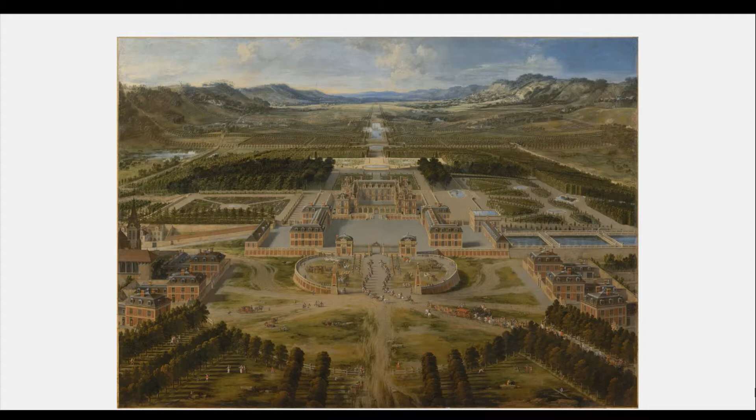The origins of the landscape ideas that underpin the urban planning of Paris are made clear by Le Nôtre's planning of Versailles, the gardens stretching to a kind of infinity, a horizon lowered so there isn't a sense of reality disturbing that infinity.

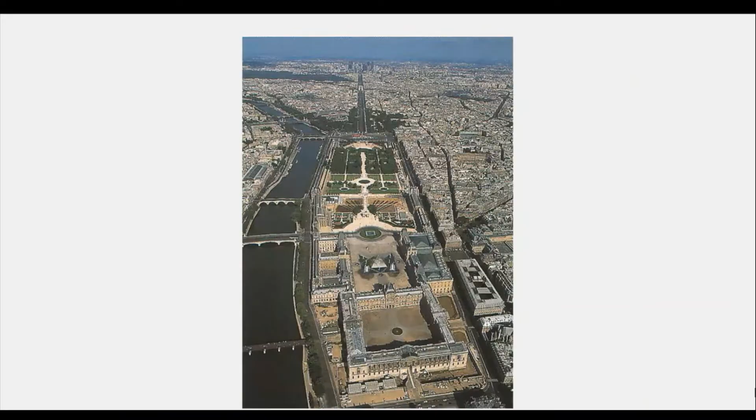And it's something that finds direct echoes clearly in La Défense, the axiality that is set up in the same way, through the grand vista and the alley of buildings around that axis.

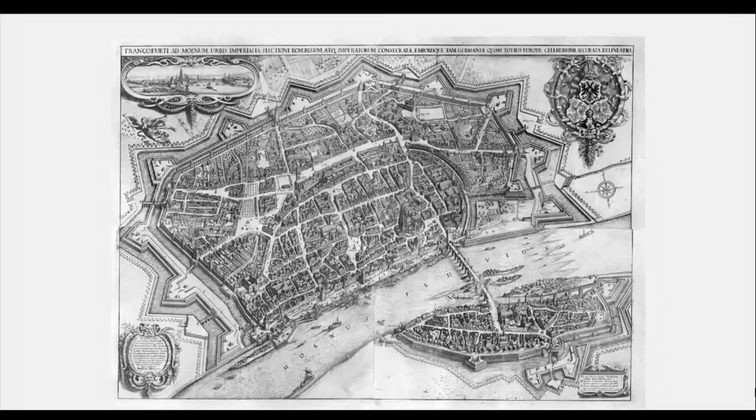That's very different from the case of Frankfurt, where the historic city was bound by defensive walls and bastions, for good historic reason, but it's then developed into an expansion that has a series of alleys of large avenues that pass beyond the defenses, which are now mainly gardens.

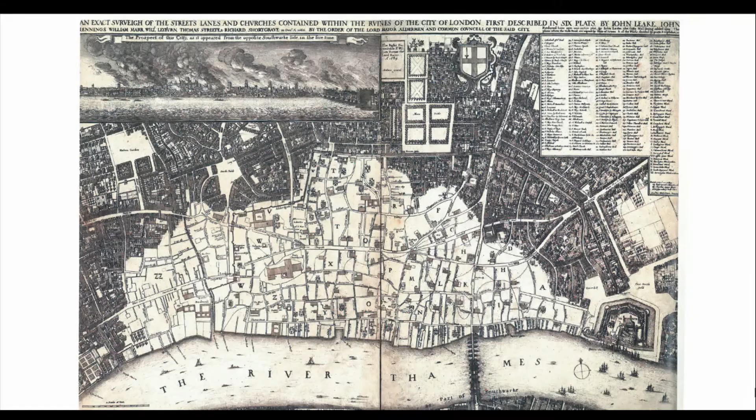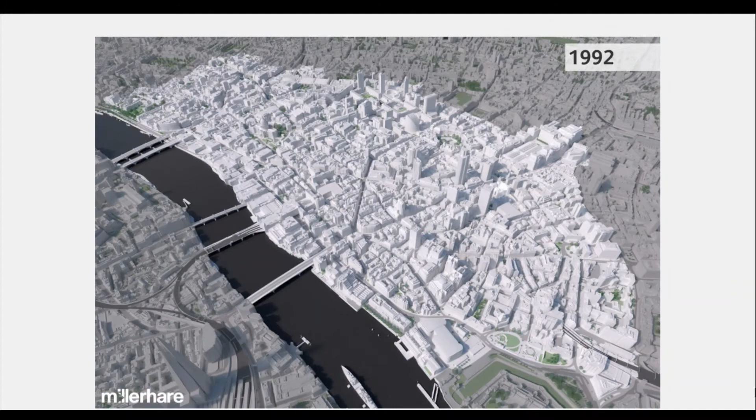Running back 30 years, we have a disposition of tall buildings treated very carefully as eye catchers on the horizon, which then develops into the more familiar sense of a cluster of taller buildings to the east of St. Paul's, very carefully created to work around those views.

And it forms a topography of high ground, peaks, lower hills. The idea being one that's derived in a way from the English picturesque tradition.

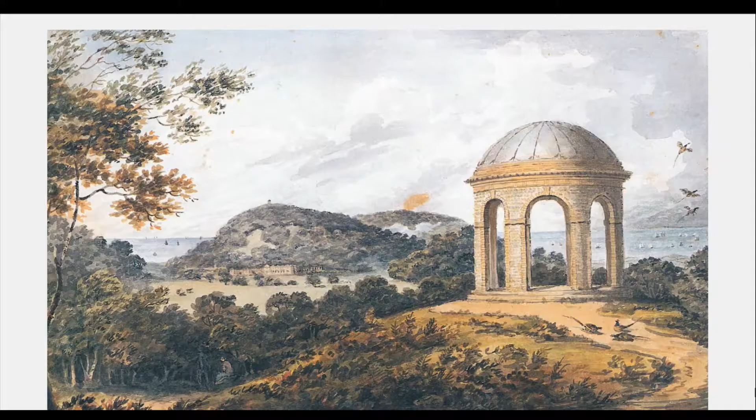This is illustrated here in one of Humphrey Repton's Red Books of 1812, a sort of before and after of a landscape tradition that sets up those vistas in an entirely different way to the axiality of the French model.

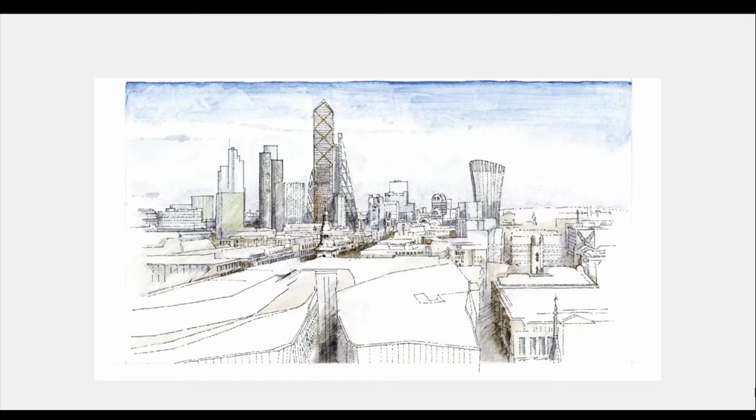And when one now finds oneself designing in the context of the Eastern Cluster, these are sketches from the competition for the Tower of One Undershaft, thinking about how it, finding itself at the epicenter as a peak, the peak, becomes a very important part of that topography.

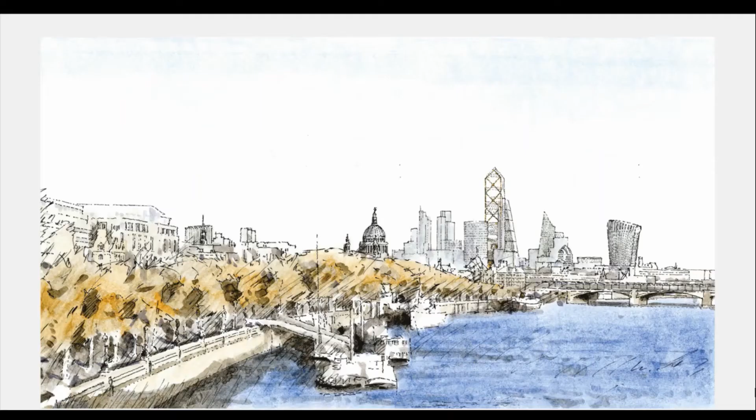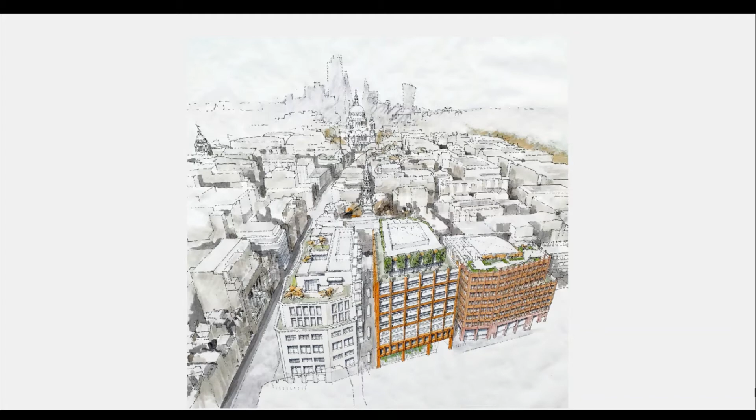Clearly seen from the river as part of a landscape beyond St. Paul's. And indeed, when understood, for instance, on the processional way, you can see how the valley described by the Leadenhall building and the Scalpel emerges to allow the dome and the lantern to remain intact against the horizon from particular views.

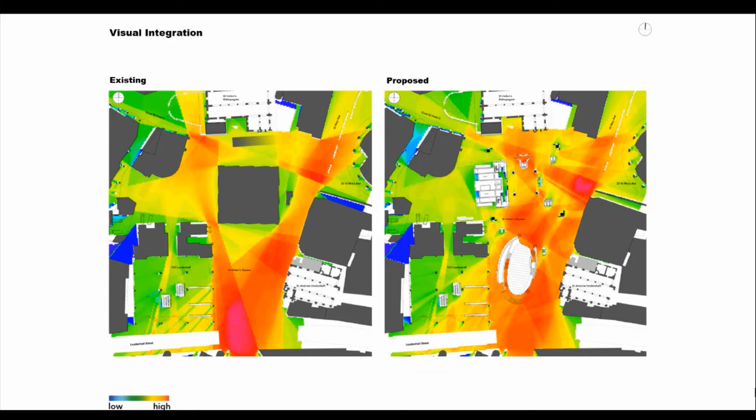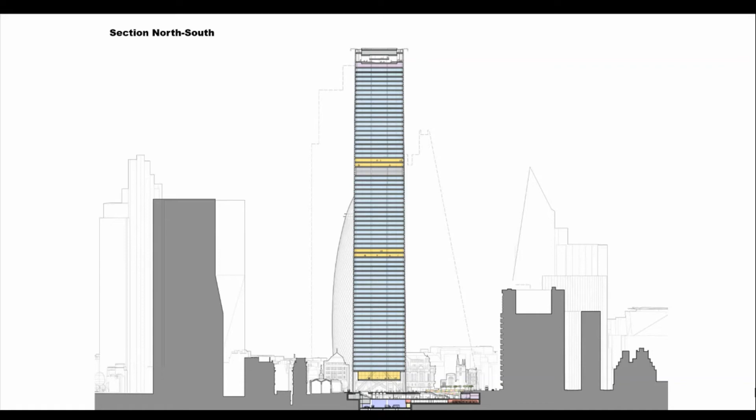This creates a sense of connectivity, of visual integration, as space syntax term it. In section, the idea is shown with lobbies lifted above the horizon of the ground, which exposes at the same height the walls of the medieval buildings, and develops a way of moving downwards to a territory at a lower court level.

So this is the ground, opening up a north-south axis of 100 meters more. It's very important to be able to set the expansion and activation of that at the lower level.

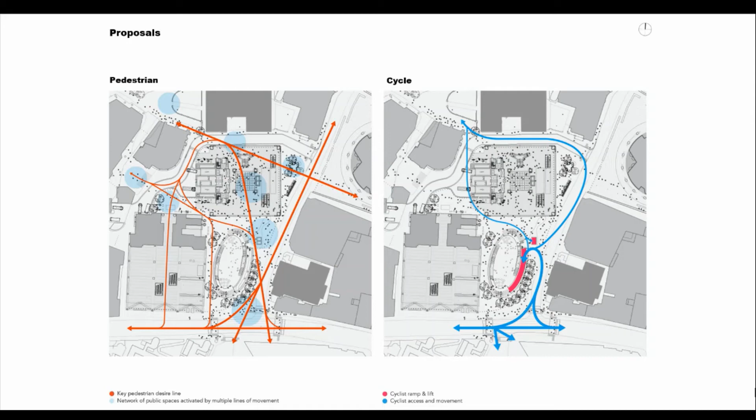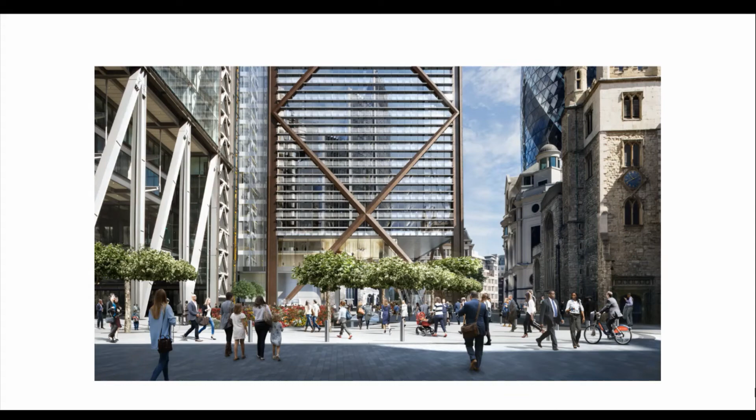At ground, the result is a huge increase in porosity and permeability for the pedestrian, and access for cyclists into an undercroft below the court at the lower level. So this is ground, and that extensive vista that is opened up.

This is the lower court area, which is an open area that works very well with wind mitigation, and has around it the retail and restaurants.

Importantly, with the green, there's an entrance with the veils of security that gives direct access to the green lifts, the firefighting lifts, which actually take you to the very top of the building, which we'll come to.

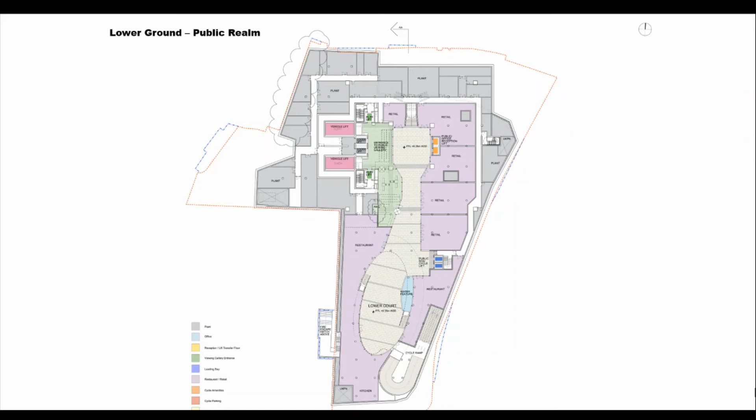The lower court is a place of conviviality, of meeting, and has, very importantly, below it an extensive area for bike storage, 1,700 places, and all the changing facilities, and to the upper side of the image, the servicing of the tower contained in a double basement.

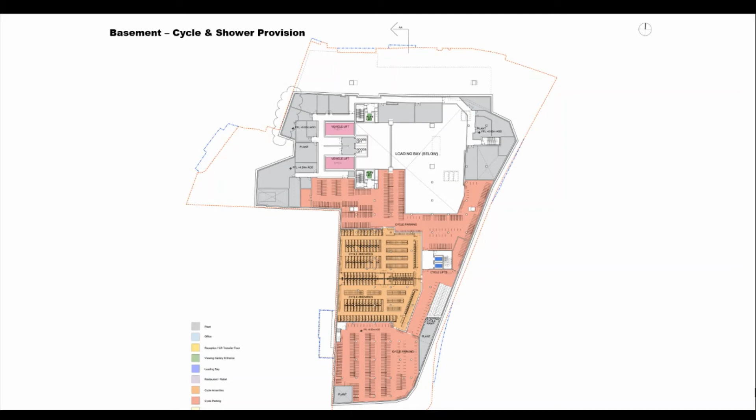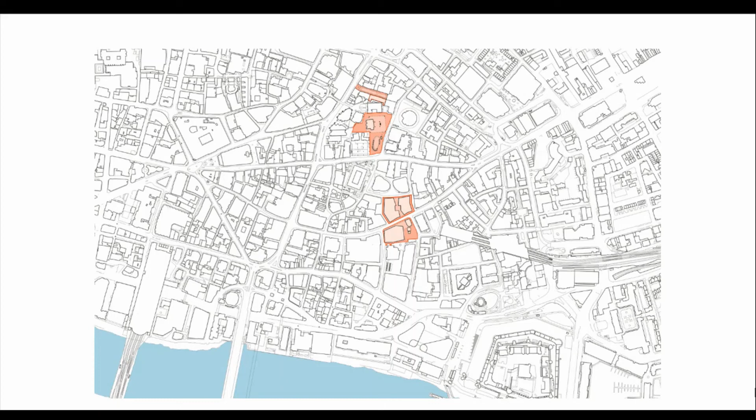This illustration shows a number of our projects. On Fenchurch Street, at the lower section, the built building of Fen Court strides over one of the north-south arteries, passageways, which is expanded and gives direct access to the 15th level, a pocket garden in the air with wonderful vistas around the city from that vantage point of a new, accessible horizon for the public.

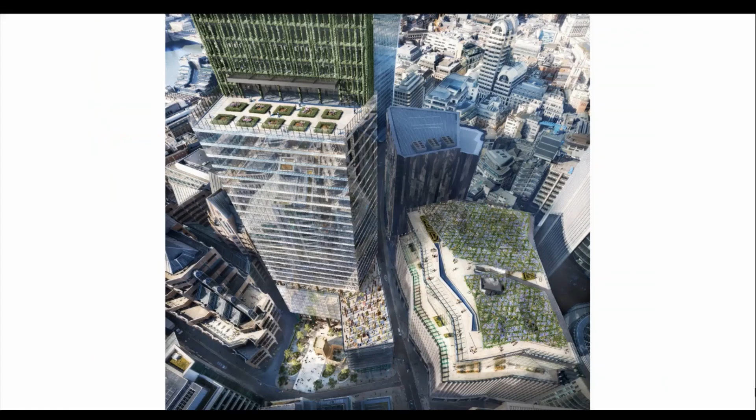That has been added to with our recent planning permission for 50 Fenchurch Street. Here at the centre of the image, the cascade of publicly accessible space is intensified by the 10th floor level on this proposal, and the ground plane as well.

Back to the Undershaft, and the sense of rising through the building with its very familiar external bracing—if one extrapolates the edges of the tower by a factor of 10, they join. So there's a very gentle entasis that invites one to the top of the building.

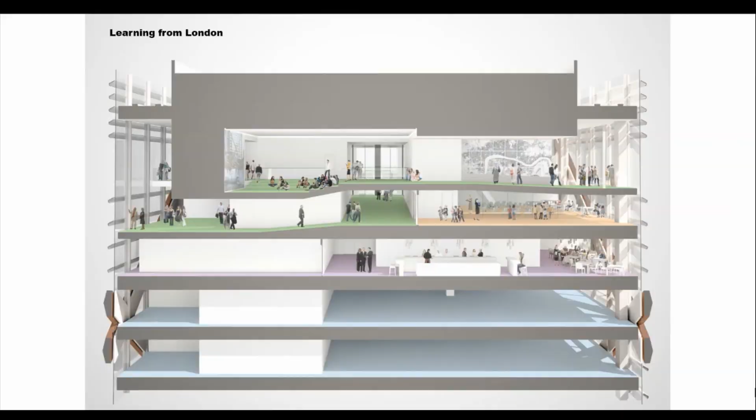That top is given over to a cultural use, a civic use, rather than a corporate use. We negotiated an agreement whereby the Museum of London would take these top two levels, with two classrooms in the air and a museum capacity to tell the tale of the development and future of the City of London, and beyond. It will be an amazing public offering at the top of the building, which is to be the tallest building in the eastern cluster.

And we very much look forward to its development.